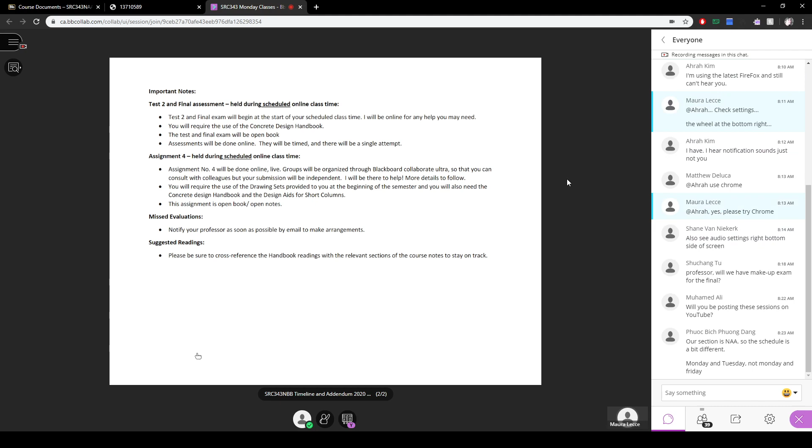Hang on a second, let me just go to this question. So our section is NAA, so the schedule will be a bit different. Let's take a look. What, did I put NBB up here? I'm sorry, guys. My apologies. Yes, this is incorrect. All right, let me see. I'm going to stop sharing this and I'm going to bring up schedule NAA. Thanks for that. That schedule is not correct. So let me stop sharing that. That's confusing. And let me see if I can get up your schedule. So just give me a minute to upload.

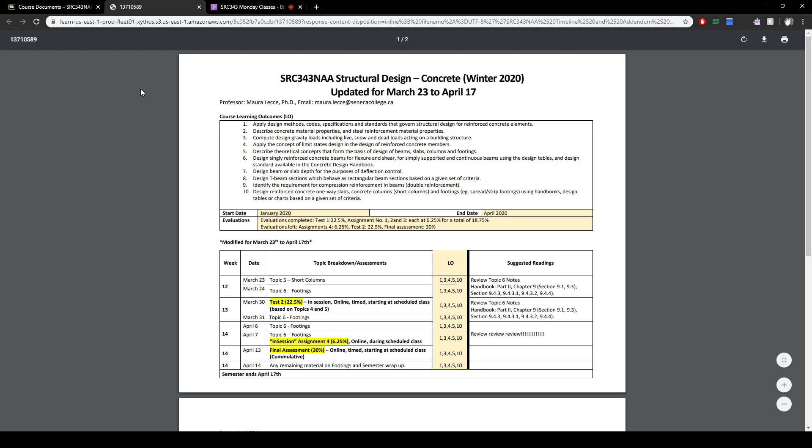Okay. So while that's uploading, there it is. Sorry about that and for any confusion. Yeah, and you are not NBB. I'm going to remove that file. Sorry about that. Okay. Let's get the right ones up there. That's better. All right. So thanks for recognizing that. So here's your section timeline. So the Monday sessions are the days of your test and final assessment.

And I'm just going to take a look at this one here. If there's any revision to this, I will let you know, or any clarifications, because my intent was to have this assignment also on the Monday. Okay, so if there's going to be a change, I'll let you know. And the other thing also is that things are changing so rapidly with this situation that, you know, there may be a need for another update in the addendum. So we're just planning on this and what you see here, and hopefully go forward with this.

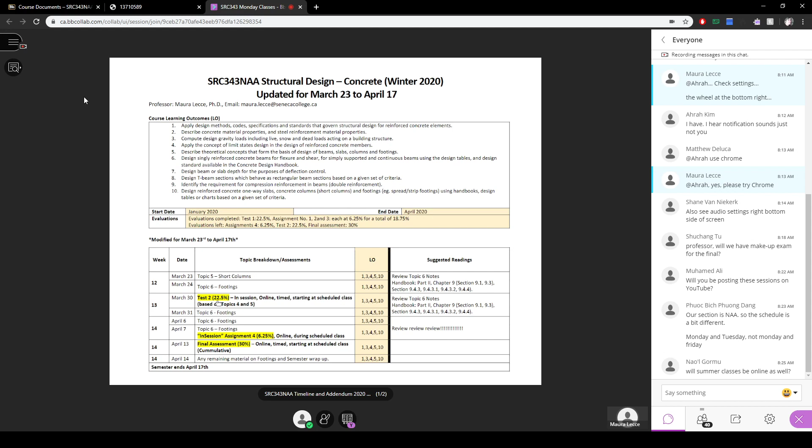But for topic number 5, it's only up to analysis. So there's no design for topic number 5. So I will send that out as an announcement on Blackboard so that you can have a better idea of what it is that you should be focusing your studies on. Okay.

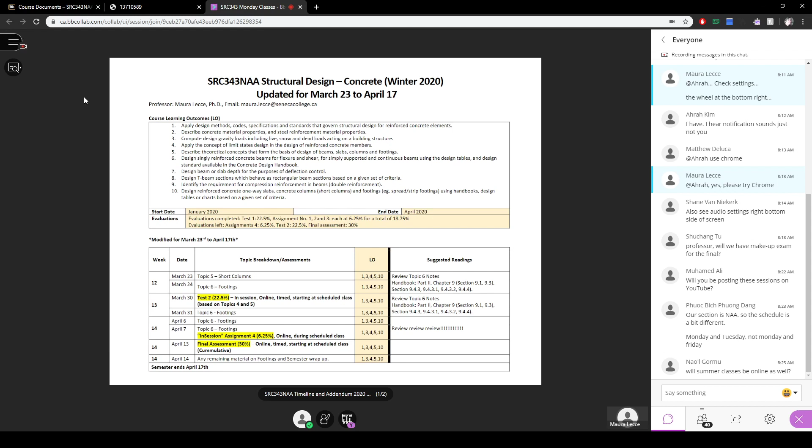All right, I'm just going to switch my screen for a second. I'm going to show you something that I've posted in Blackboard. Give me a minute here. Okay, so what you should be seeing right now, let's stop sharing that and we'll share the screen. All right, so it took just a minute or so to upload there. So right now you should be seeing my screen.

So I've made my screen shared with you, and what I'm looking at is the course. And this is in student preview, so this is something that you would see. So you'd come in and you'd land on the announcements page, and I hope that you've been keeping up to date with some of the announcements. I know you're probably overwhelmed with all your classes and all the announcements that I'm making.

If you have any troubleshooting issues, please follow these instructions that I gave here. The title of the announcement is Online Classes on Blackboard Collaborate, Some Tips and Troubleshooting. So please follow that along. If it's working today for you, fantastic. But if you feel that you're having difficulties in the future, please try those steps and some of those tips.

If you look into course documents, I'm not going to create any new folders. It'll be like a one-stop shop for you. Just go into course documents for anything that is coming up in this course, including course documents, tests, and assignment stuff. All of that will be listed in the course documents.

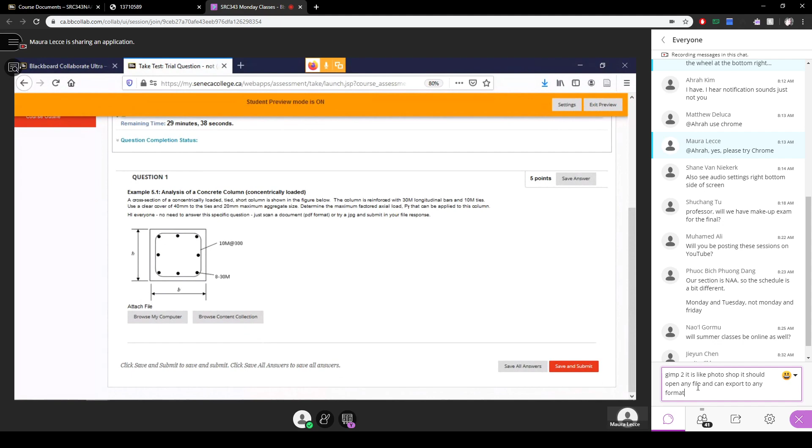And this requires a file submission. So you'll see that it asks you to attach a file. So right at the bottom here, it's asking you to attach a file. And so you would go to browse my computer and you would attach a file and submit. Okay, the best file format is PDF. So I'd like for everyone to try to do that.

I want to get that all sorted out this week because I don't want to have any issues on Monday. So I'd like everyone to try it at least once. And I will respond to you to tell you that I can see it. So as you know, in this course, some of the questions are quite lengthy, and we can't just rely on multiple choice in this course.

So I take a question that may be worth 5 or 10 marks, and I allocate part marks. And that's important for me. It's important for you to be able to get credit for the process that is correct. So this is the way we can do it. So I just want to make sure that everyone is able to do this and sort out any technical issues in advance of Monday, because come Monday, that's when you're going to have your test.

Okay, so if you've tried it already, the last time I looked at all this stuff was on Saturday, and I put some feedback to you all, and I can definitely give you feedback through the system. If you've tried it after that, then I haven't had a chance to see it yet. So I promise to go through it. I'll go through every single one who's tried to submit something, and I'll give you a comment. Perfect if it's no problem. If there's an issue with opening up your file, I will let you know.

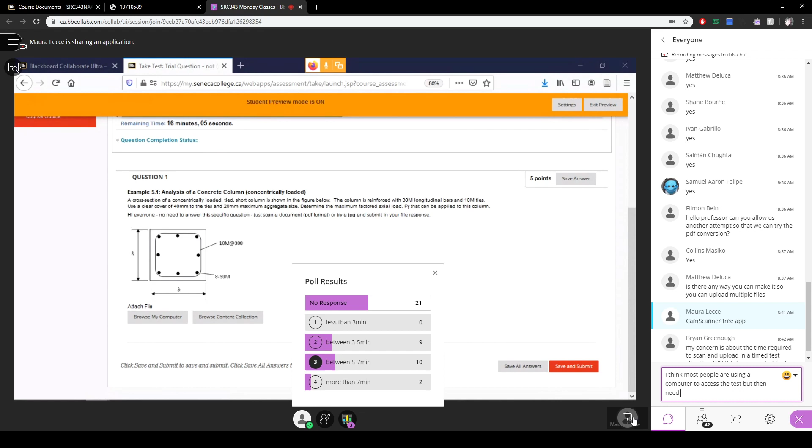But if you've tried it and it's taken you long because it was the first time you tried it, I can certainly reset the test, or I could do another trial, and you can try it again and see how that works for you. I just want to make sure everyone's on board with the technology so that there's no issues on Monday, okay? Or to minimize the number of issues. So yes, I'll take into account the fact that you have to upload that information. Okay, that'll be part of my planning. Okay. All right, are there any other questions about what to expect?

Okay, so tests will be timed, and I'm timing them because I'm respecting the schedule, because I know you all have other classes that you have to get to, and this online, you're going to be jumping from one class to another, so I have to respect that timing as well. So

yeah, so Spencer's comment about most people are using the computer to access the test, but then need to move a file from the phone to the computer. Yeah, I would expect that, and that's what I did. So I did this with my phone. I took a picture with my phone, moved it over to my computer, and then uploaded it from there.

And I'm not particularly tech savvy, but that's a way I found that worked. And it took me between about 3 to 5 minutes. Okay, so I think between 3 to 7 minutes is a reasonable amount of time to be able to get that process done. So I'll build that into the test timing.

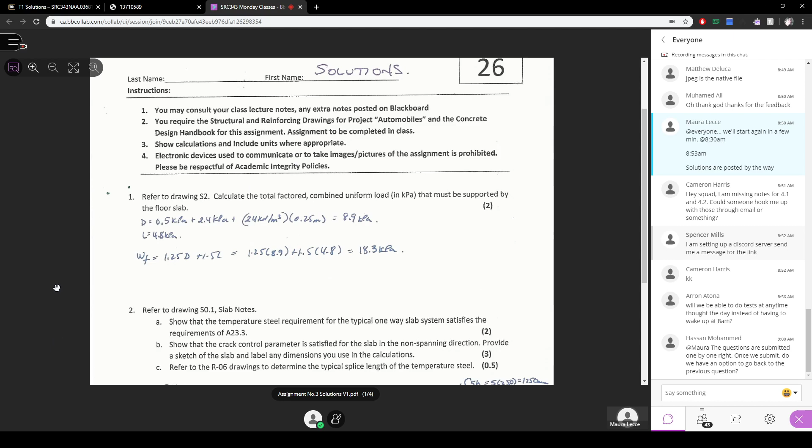You check AS-min, that's 0.002 AG, and you come up with 500 millimeters squared per meter. In the slab, you always consider a width of 1,000 millimeters, and 250 is the depth of the slab. You would not include the 100 millimeter concrete topping, just the slab depth of 250 millimeters. You also have to make sure the spacing is less than or equal to either 5H or 500 millimeters. That is true in both cases.

So AS-min is 500 millimeters squared. To calculate the actual AS, you take AB, the area of the bar, times 1,000 divided by the spacing. Let me show you where I am here. Hang on. My pencil.

Okay, so it's allowing me to, there we go. So when we're finding AS, then we take the area of the bar, which is 200 square millimeters, times 1,000 divided by the spacing, which is 400. That information is already given. All we're doing is we're showing that it actually works. So 500 millimeters squared per meter is actually equal to, it's not greater than, but it's equal to AS-min. So that works, it's fine.

And then the second question is to show that the crack control parameter is satisfied for the slab in the non-spanning direction, and provide a sketch of the slab and label any dimensions that you use in the calculations. And the reason this sketch is here is just to give you a sense of where things are laid out. So if we're looking at the bottom, the lower layer rebar will be the rebar that's used for tension. Okay, so that's the design steel that is used for the purposes of flexure.

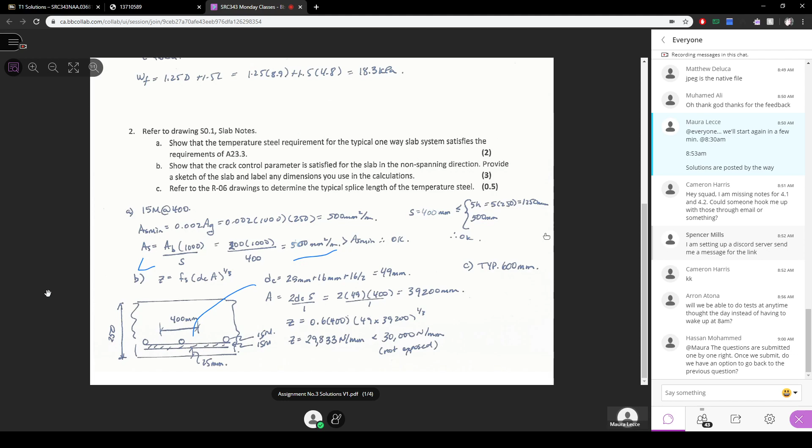C is, what is the typical splice length of the temperature steel? So let me see if I have an image that I can bring up to show you where you can find that. Okay, right now what I have showing you is just the structural images. Let me bring up the other ones. So give me a second while I bring up those notes, because I think a lot of people missed this one. Once you see it, you'll see how easy it is to get that value of 600 millimeters. So I'm going to mute myself for a second and bring up those drawings.

The reason I'm going through this, by the way, is because you're going to have a question on test number 2 that is going to look very much like assignment number 3. This assignment number 3 is very relevant to test number 2. That's why I'm taking my time to go through it. So give me a minute while I get that file up.

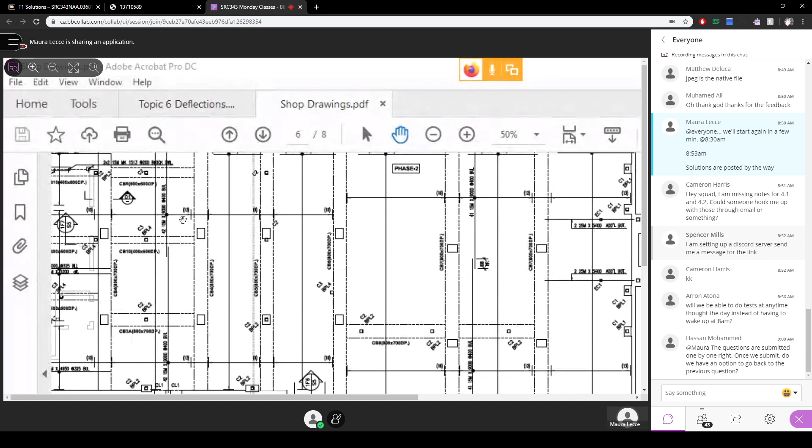Okay, so right now I'm looking at the reinforcing detail drawings, and if you happen to have them with you, I'm taking a look at page, okay, top reinforcement. I'll go to the bottom one. Let me go to the previous page. So bottom reinforcement, I'm looking at R06. Okay, so I'm just looking at page R06.

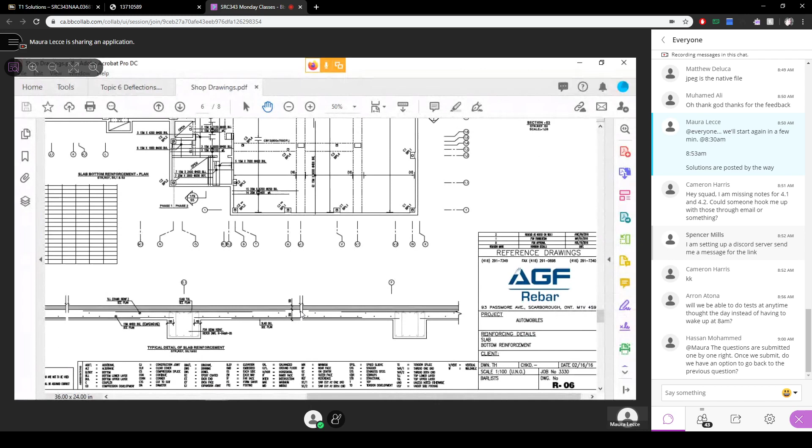And if I take a look, these are the drawings that show the details of the reinforcement. So there's a ton of information about the rebars in this set of drawings. In the structural drawings, they will be more lean. They'll just give you the bare essentials like the size of the bar and the spacing, and some typical details, but they won't go into so much detail about the number of bars and the length of the bars and all that.

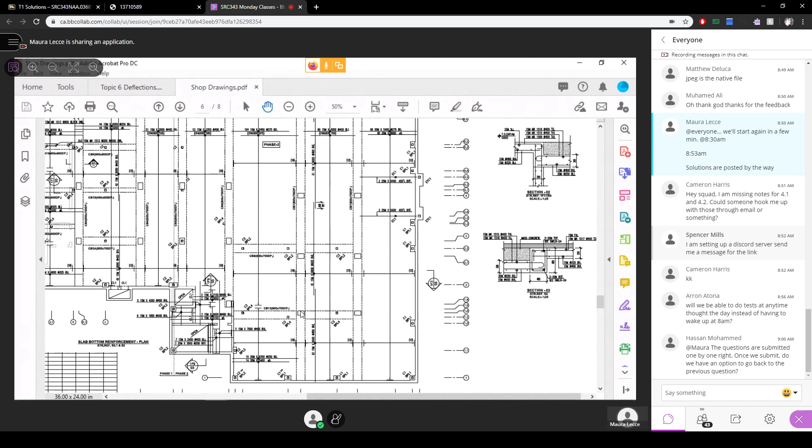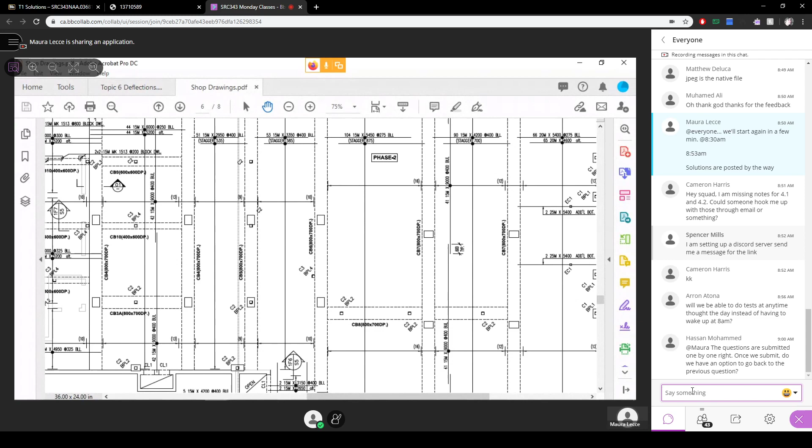So in this drawing, I'll zoom into the spot where you can see. So here, these ones going in the north-south direction. Let's see if we can see it. You may not be able to see my cursor, but I'm zooming into a spot where it shows the typical splice length. So a splice is like an overlap, where one bar overlaps another, and it doesn't have to be one on top of the other. It could be side to side.

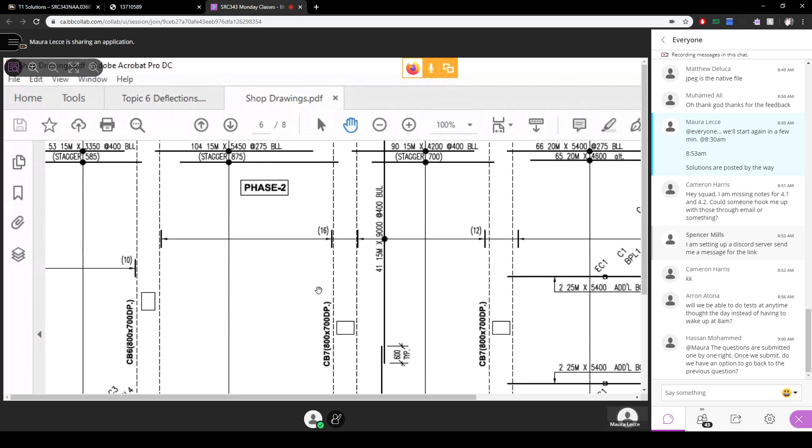The typical splice length is, here we go, get that in the middle of the screen. And the typical splice length you can see right there, probably in the middle of the screen, is about 600 millimeters typical. Okay, so these are these bars that are running in the north-south direction where you see 600 millimeters typical, where that's the splice length.

It says 41 15M by 9,000 at 400 BLL. So what that means is that there's 41 bars, so that's the count. The size or the bar nominal size is 15M, so that's the designation of the bar. The length of the bar is 9,000 millimeters, and they're spaced at 400 millimeters. And it's the bottom lower layer, that's BLL.

So this basically describes how many bars for temperature steel in this area here. So it shows you with this little dot and then the arrow that extends from those dots. So right where you see the 41 15M by 9,000, there's a dot right sort of in the middle there, and you can see extended from that dot the dimension line that shows the arrows.

From one end of the arrow to the other end of the arrow, you have 41 15M bars that are spaced at 400 millimeters center to center, and the length of the bar, so in the north-south direction, the length of the bar is 9 meters or 9,000 millimeters.

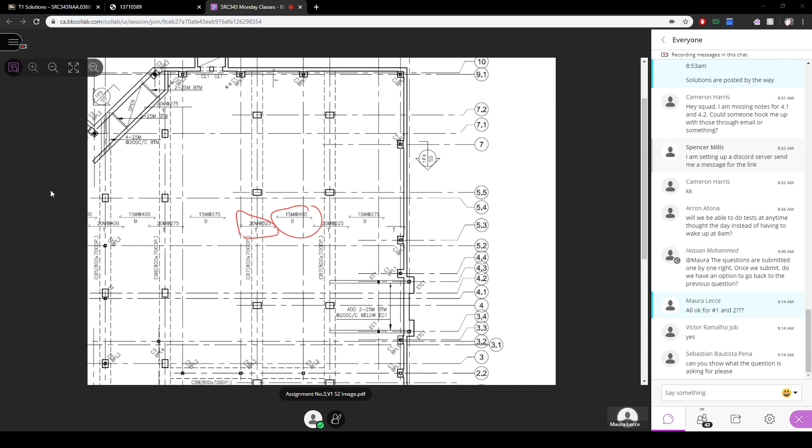If you are in between the supports, say for example here, 15M at 400 B, that's 15M bars spaced at 400 millimeters, center to center, at the bottom. That tells you it is positive bending because that's where the tension is, at the bottom. If you go across the whole page, you can see there's a mix of bottom, top, etc. And it also shows you the direction of the span.

This arrow shows you the direction of the span of the slab and also the direction of the rebar. So the rebar for tension reinforcement is running in the east-west direction, and it's a mix of bottom and top, depending on whether it's between the supports or over the supports.

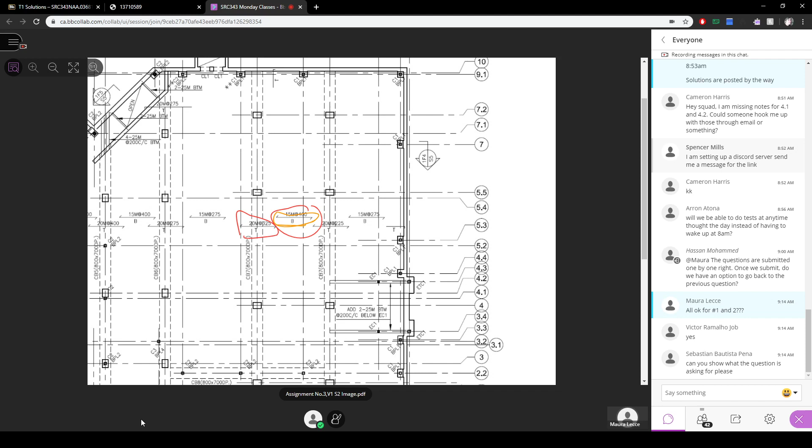So I would encourage you strongly, hint, hint, nudge, nudge, wink, wink, to review this layout and understand what it means to have top bars and bottom bars. If you're given the bar size and the spacing of the bar, you can determine the moment resistance, and that was part of the question. So I'll go back to the assignment number 3 solutions.

Arron, I'll get to your question in a second, but I'll get through this solution. So here I have 20M at 325, bars are at the top. It's negative bending. I know it's negative bending because the tension is at the top. Sorry, let me go back to these drawings, S2.

This set of structural drawings shows only the information for the design steel, meaning the steel designed for flexure, for tension. This is the steel that's going to help the concrete handle any tension in the slab. The temperature steel details are not included in this plan view. There's a mention of the temperature steel in the notes, but the details are not given in this image.

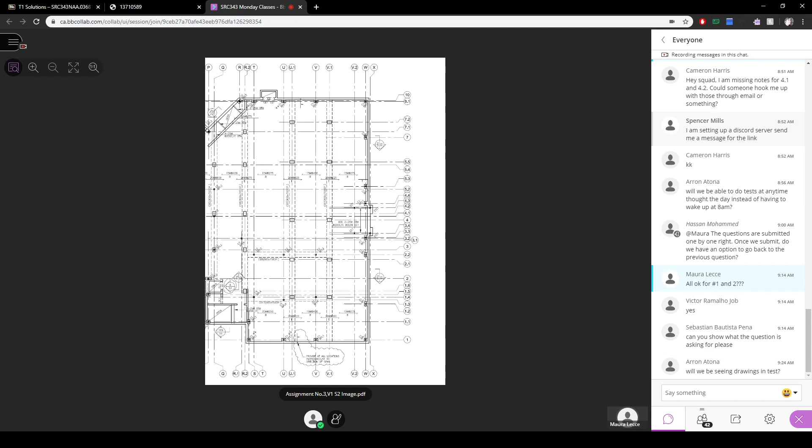Okay, the reinforcing detail drawings give you a lot more information about the detail of the bars. All right, I'll go back to this question. So you have the bar size, the spacing. The first question is: is it positive or negative bending? Justify your answer. We've had some experience in class about design, whether bars should go at the top or at the bottom and the reasons for it.

And then part B is to determine the moment resistance for a 1 meter width of the continuous slab along that line. So looking at that top reinforcement of 20M at 325, what is the moment resistance? So you know how much steel is in there. Determine As, okay, by using this formula, Ab times 1,000 divided by s. Now, some people used the number of bars. You cannot use number of bars for a slab. It's always going to be based on spacing.

So As, the area of steel, is Ab, which is 300 in this case because I'm using 20M bars, times 1,000 divided by 325. 325 is the spacing. So you get 923 millimeters squared per meter. There were a number of students who used instead a number of bars, like 4 bars or 3 bars. You don't convert this into a number of bars because in a slab, you're only looking at a 1 meter width, and it's possible in that 1 meter width to catch a fraction of a bar.

It's very different than when you're looking at a beam. In a beam, you have a set number of bars. In a column, you have a set number of bars. But in a slab, because you're taking a 1 meter width, it's possible to capture a fraction of a bar within that 1 meter. So you determine As, you get rho. You have to figure out a d value. So d is the depth from the extreme compression fiber to the centroid of the tension rebar.

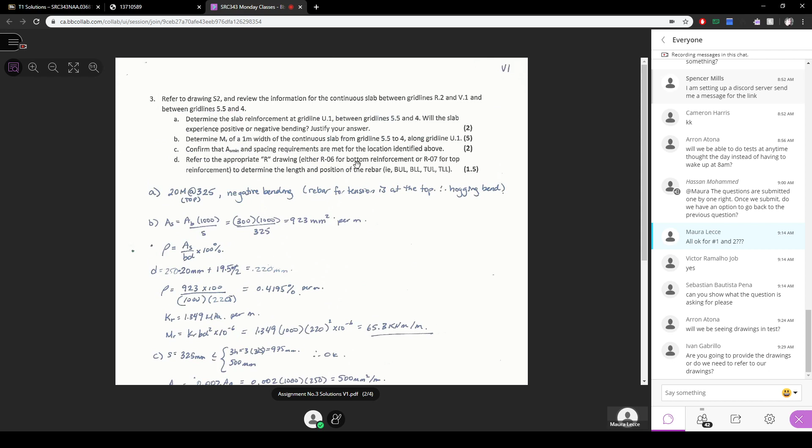And the lengths, so the last part of the question is refer to the appropriate R drawings and determine the length and position of the bars. So if we pop in to the reinforcing details, now this one is top reinforcing, so I need to go to the R6, no, sorry, R7, is it R7? Let me see. So for top rebar, I would be looking at R7. So I'm just going to pop into that. So I'll stop sharing this and I'll pop into the drawing set.

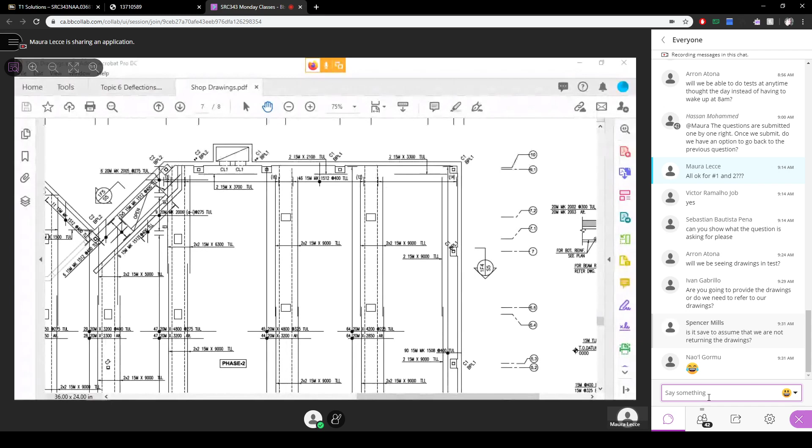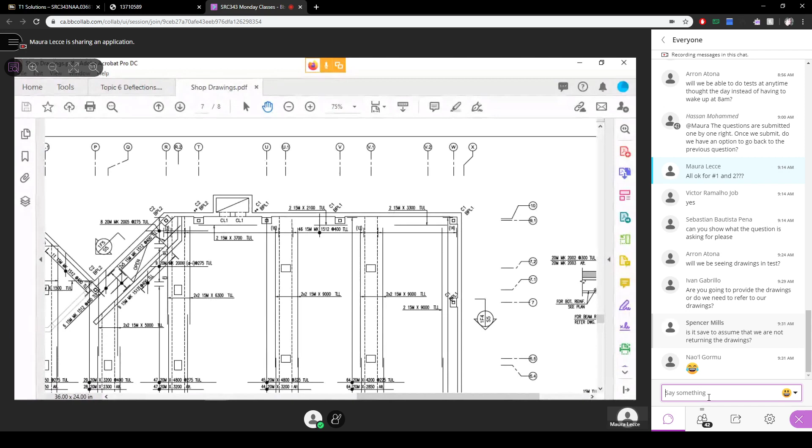see here. If I take a look at U1, right now I'm staring at the drawings that give me more of the reinforcing detail. So I'm looking at line U1, and let's take a look. If I zoom in right here, this gives me more detail. If you look at the center of your screen, I'm looking at more of the detail about that top reinforcement. It says here there's 45 bars, 20M by 4,800 at 325 TUL. That's top upper layer.

So there are 45 bars, that's the count, 20M is the size, at 325, that's the spacing center to center. The length of the bar is 4,800 millimeters. It goes in the east-west direction. And you can see a line right under that. It says 44 20M bars at 3,200 alternate. What that means is that they're just alternating the bar lengths from 4,800 to 3,200.

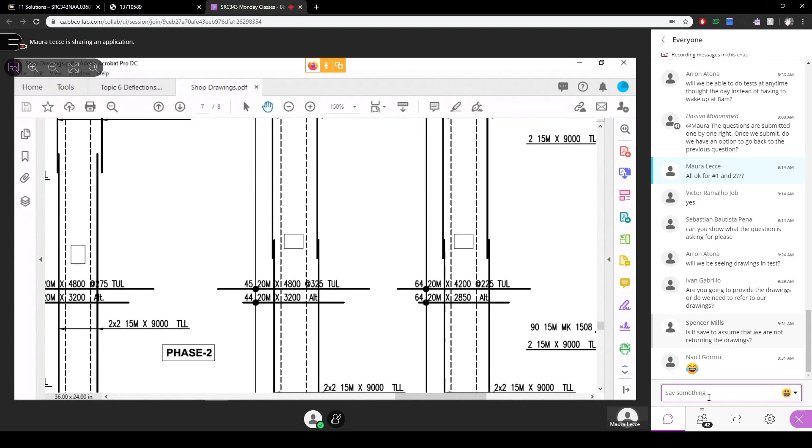So if you wrote down both numbers, that's great. If you gave me at least one of them, I was happy. And it's TUL, which is top upper layer. Okay. So are there any questions about number 3? So again, I'm going to repeat myself. I like this question. It's a nice question to get you to look at drawings and make sense of what it is that you're looking at and tying it into the calculations you've seen in class. So you might see something similar on a test situation.

Question number 4, I think was really just quite a giveaway. It's very, very similar to a question that we did in class. So this is a T-beam, a beam design where we're taking into account the flange or that slab portion. And it just helps to make the design a little bit more efficient in terms of the resulting number of bars. But it requires a couple extra steps in design calculations.

So this was pretty much step-by-step something that we covered in class. As long as you followed those steps and you were able to understand the differences and plug in the right values where they were needed, hopefully this wasn't too difficult to do. So this one was very straightforward, very much like a question that we did in class. And I guess my biggest comment for this one, it was pretty much well done.

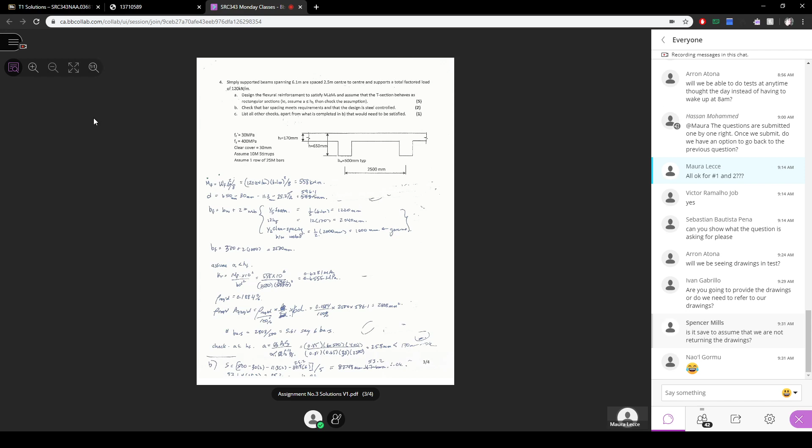And the solutions to this version are posted on Blackboard. So your version, your numbers may be a bit different. Your values where you're looking at in the drawings may be a bit different. If you have specific questions about what you were looking at, please do feel free to email me and I'll try to sort that out for you.

That's pretty much it. Are there any other burning questions about the addendum, what to expect for scheduling, anything like that? So we'll follow the addendum that I posted. If there are going to be any changes, should the college make any additional changes to what we need to do, I will keep you informed and I'll update as we go along. So if you have accommodations, please reach out to me just to make sure that we're on the same page, and take a look at your schedule from all your courses and the completion plan for all your courses.